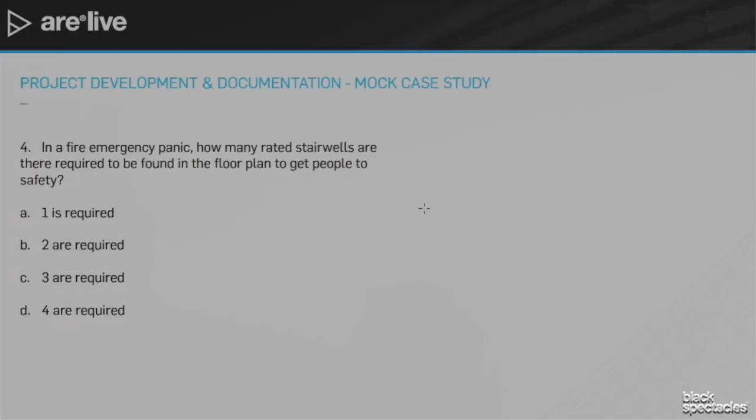Number 4: in a fire emergency panic, how many rated stairwells are required to be found in the floor plan to get people to safety? So you probably know this already. What do you think the answer is? Give you a second. The answer is going to be 2. Right? We need 2 ways of egress.

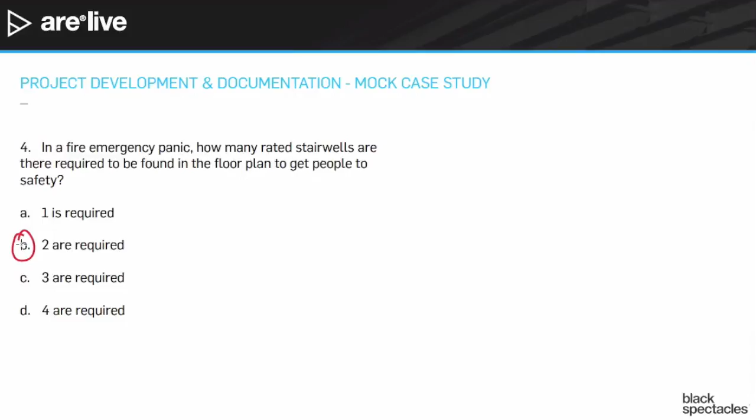If this was a bigger building, we might need more. If this was a tiny building, we might be able to get away with just 1. But let's just confirm our thoughts about it. So in this case, I'm going to go back to the building code. Now remember, I've sort of skipped ahead on a lot of these. If we were coming at these totally blind, I would be looking at the program in certain situations.

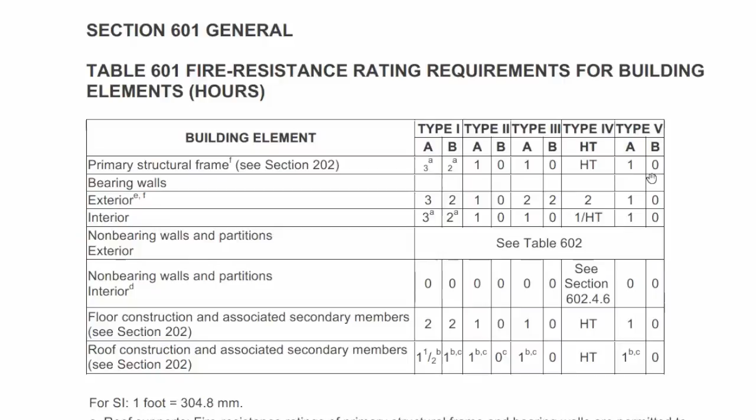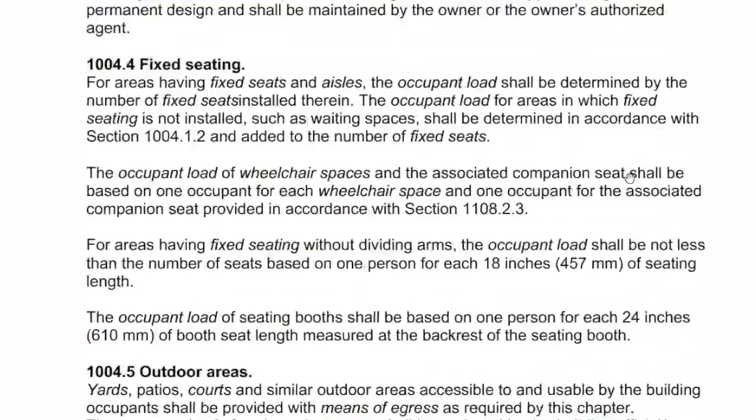I'd be looking at the climate in other ones to gather enough information to then be able to go to the building code. In the interest of time, I'm just going straight to the complicated one. So that's why I'm using the building code so much on this. So, all right, let's go to the building code. And the question was the minimum number of exits. So where is that going to be? That's going to be in the means of egress section, because exiting obviously is part of the means of egress.

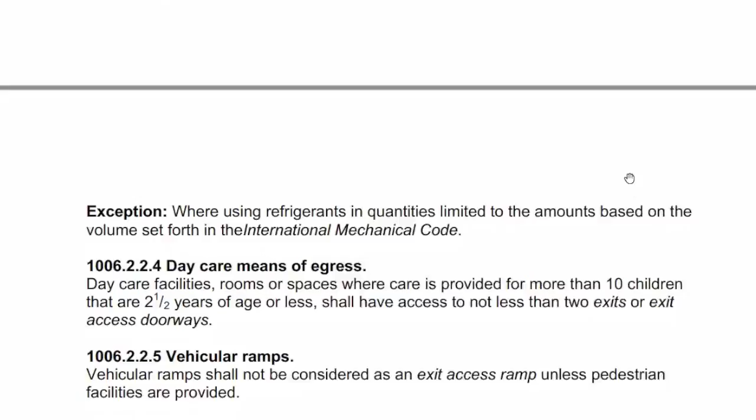And there we go right there. Under the means of egress, we find minimum number of exits or access to exits per story. For occupant load of 1 to 500, remember we've already done an occupant load. We had 400 people, but even more importantly, we're talking about an individual story of the building. So this is going to be maybe 100 people per floor. So we're definitely below the 500 number, and that's going to require us to have those 2 exits. If we were much, much bigger, we might have to have 3, possibly even 4 exits.

That's not the only reason that we would choose the number of exits. It could also be we have the same size building, but it's oriented in a much different way. It's much longer and thinner. And so therefore, our egress distance might not meet it. We might have to add a 3rd stairwell just because the length of somebody going from one of the offices all the way to an egress stair might have been stretched out so far that it goes beyond that actual allowance, which in this case would be 200 feet if it was a non-sprinklered building and 300 feet if it was a sprinklered building.

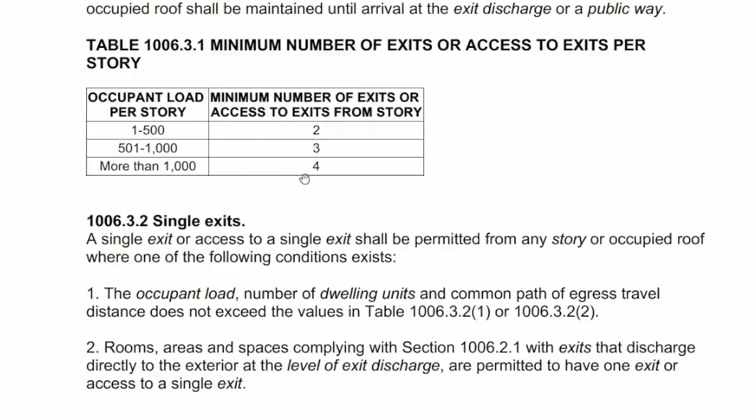So there's multiple ways we might attack this issue of how many stairwells there are, but the question didn't ask about any of that sort of extra complication. It didn't give us any of that. Plus, as we look at the site plan or the site photo, this is a fairly compact site. There's really no way that we could have a building that was 400 feet long. So we couldn't really get into that kind of situation. So it doesn't really apply.

So you're using the information, kind of making a judgment call from the various pieces of information you have. If you were tight on time, this is definitely one of those ones that I would have said, yeah, sounds like 2 to me, and I would have guessed on it without even bothering going through it all. But there you go. We just went through and found it, and we feel pretty comfortable with it.

I think there's probably something here to say out loud. So as you're scrolling through all those pages, if I had never done a code review in my life, I would be like, how in the world does Mike know where to go? No, absolutely. I think the thing to say here is, if you're thinking about taking this exam, a great way to prepare for this exam is to do a couple of code reviews.

And so maybe you're working on a project and you're just doing some modeling and drawing. Maybe you can go back and say, hey, project architect or project manager, I want to do a code review on this. And then go do 3 or 4 code reviews in your office. Take projects that already have a code review that's done. Because the thing is, and I'm sure this is what Mike's going to say, is that you go to the same places. Yeah. You're collecting the same information time after time after time.

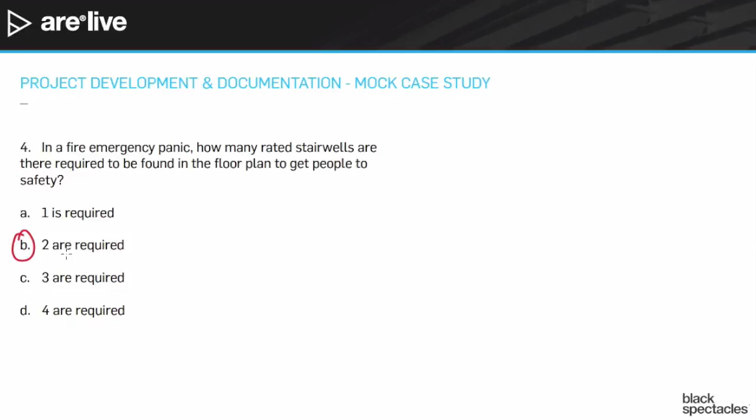And you should absolutely be using this. People want to help you get through this process. Everybody is on your side on this, and so if you ask somebody and say, look, I don't have an opportunity to do code reviews, but I need to be able to do this to pass this exam, they'll spend a lunch with you and help you, bring the books or bring their code reviews from other projects, and give you a chance to look through them. People really want to help you through these exams, so use that momentum to help you out.